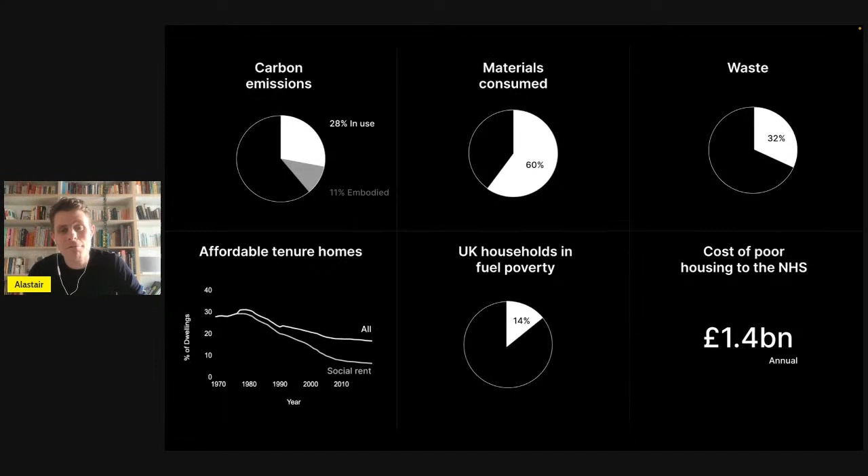We know that we still have a massive shortage. We're still building incredibly poor quality housing. We have a massive shortage of affordable tenure homes on things like public land. Buildings are still huge contributors to the single biggest source of material consumption, and so on and so forth across pretty much every metric, right? We don't need to spell these out. Upshot is we're doing collectively really, really badly at transforming the way we build for the 21st century.

And one of the things I always find weird about this is that actually the strange thing is that most of us agree on what it is we want, right? On what it is we're trying to achieve. We're trying to build beautiful, zero carbon, zero waste, leafy, green neighborhoods with generous, warm homes, prosperous local businesses, great community infrastructure, these kind of neighborhoods that are great places to grow up and to grow old. Pretty much nobody disagrees with that.

And yet, for the large part, we're not doing it. And it's not because we don't have the knowledge. The knowledge is already here; in the words of William Gibson, the future is already here, it's just not very well distributed yet. So we have the knowledge. We kind of have the collective will. So the question is, why not?

To some extent, the answer to that is to do with incentives. It's complex, and this is a big part of some of the other work that Open Systems Lab are doing, looking at things like how we can redesign our land system and our planning system. But actually, to a huge extent, there are examples that get through, and that tells us something if you go and speak to those kind of groups

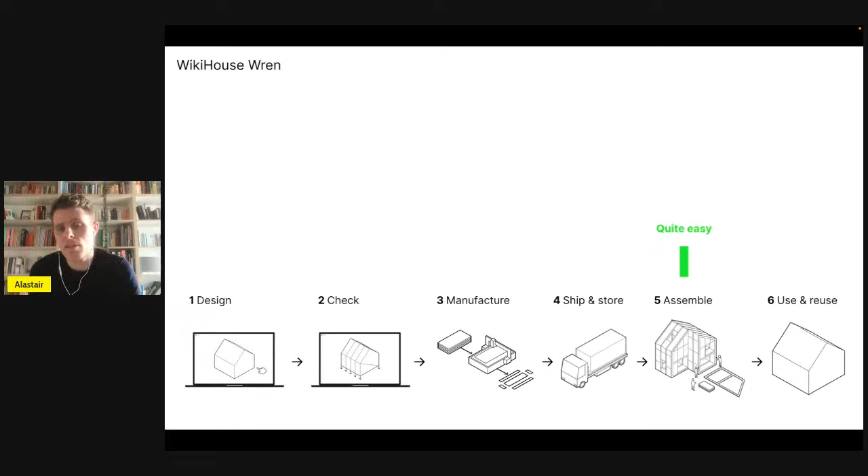But the truth is, it was really obvious to us as we were working with others using this system, that the rest of the process really wasn't easy at all. Right? The system was really hard to design with. Pretty much every design had to be custom and bespoke, and that also meant that it was really hard to document as well, really hard to share files. And Clayton will talk a bit more about how Skylark changes that.

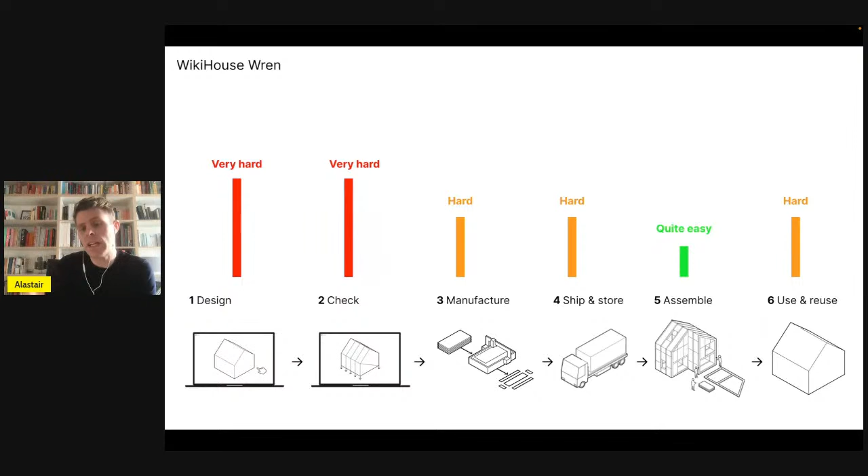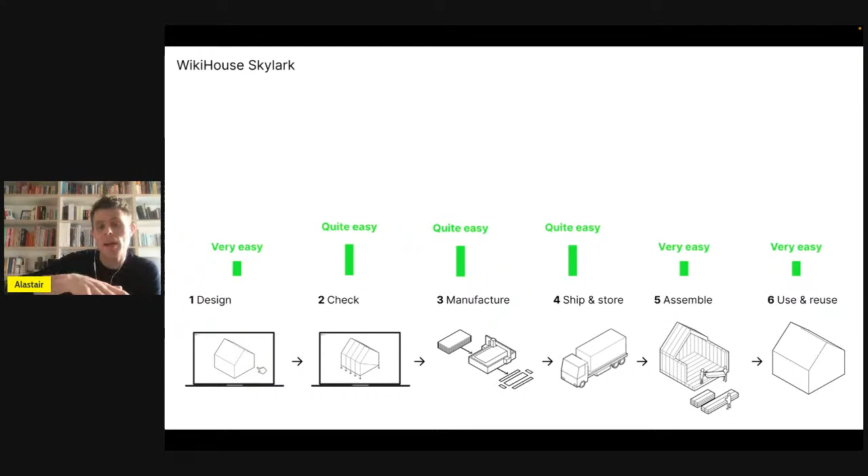But then it was really hard for engineers to understand in each case, etc. Then on site you ended up with this stack of hundreds and hundreds of parts that you had to sort through and store. So when we looked at the whole picture, we were really aware that actually our job isn't done until the whole thing looks something more like this, right? So this is our ambition, to say, how can we make the entire process as simple as possible? And really the objective is this, right?

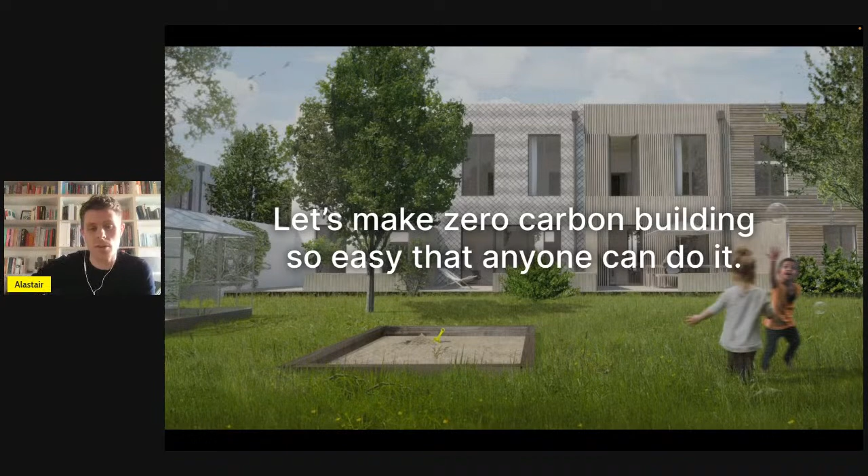This in itself will not end the housing crisis or anything like that. But what we can at least do is take the idea that building zero carbon homes is difficult off the table. Let's make it so easy that any business, any community, anyone can do it, and everyone knows that they can do it. That's really what we're trying to do, trying to move ourselves into that kind of future as quickly as we can.

The second big idea is obviously the one about manufacturing. So in the last few years, there's been huge progress, particularly in the UK, around moving towards more manufactured models of building, which is cool, right? It's dragging construction, I wouldn't say into the 21st century, but at least into the 20th century. And generally speaking, when we're talking about off-site manufactured homes, you're talking about something that looks like this, right? These huge factories that cost many millions of pounds to set up, and that's cool, right? These are really impressive facilities that can turn out one or two houses a day at least, right?

So really impressive, but there are also real issues with this model. So it's good for some things, but it's not good for everything. It's particularly good for large-scale projects, large-scale supply chains on big sites with a much more standardized product. But of course, that's not true of all development, right? Lots of projects aren't big projects. They're small projects on small sites that are slightly customized. They also tend to be less resistant to sudden spikes in demand and also downturns, and that's historically been the most challenging thing for this model of highly centralized manufacturing: you get a downturn in the economy and you have this amazing capacity but no demand.

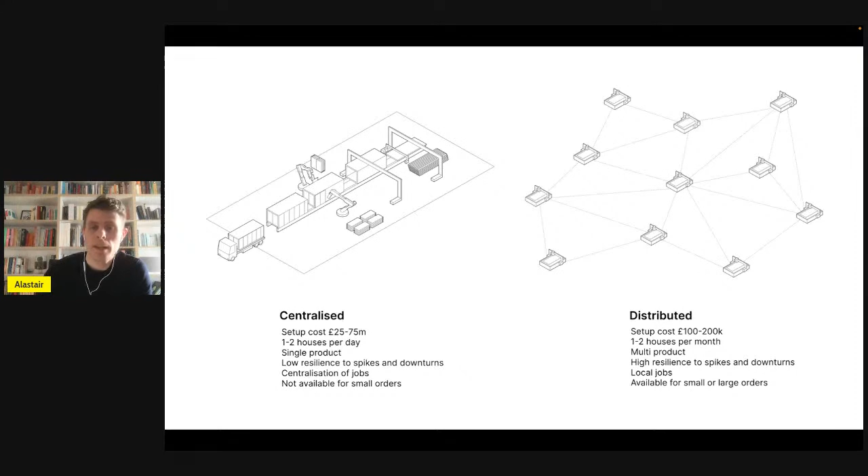And so the other big idea about WikiHouse began with this idea of, well, wait a minute, if we can make a building system that can be manufactured in a really small scale factory, which has a really small setup cost, you can have local small businesses manufacturing these components, and collectively this network of distributed manufacturers can form an industrial capacity which can at least match, but potentially in many ways be more effective, not necessarily as efficient, but more effective and more flexible and more resilient. And that is a cool vision of manufacturing. So let's actually make that real as a manufacturing approach.

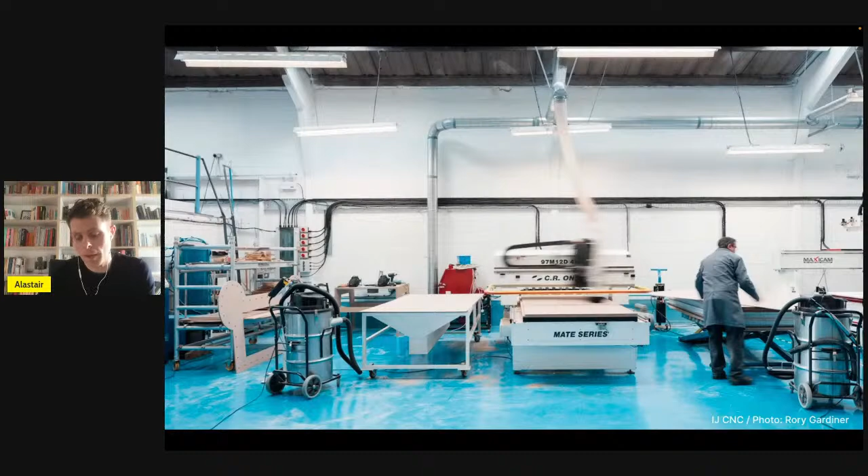So maybe the housing factory of the future doesn't only look something like this, it can also look something like this. And I know a lot of you have manufactured WikiHouses in spaces a bit like this one. And so that's a really big part of the work, that when we're working on Skylark, we haven't just been thinking about designing the end product, the end houses, but designing the whole process and really thinking through the economics of space and really trying to optimize that. And again, Clayton will talk a little bit more about that, but this idea of the shifter blocks was trying to make sure that we do a little bit more of the pre-assembly in the manufacturing space as the sheets come off the machine.

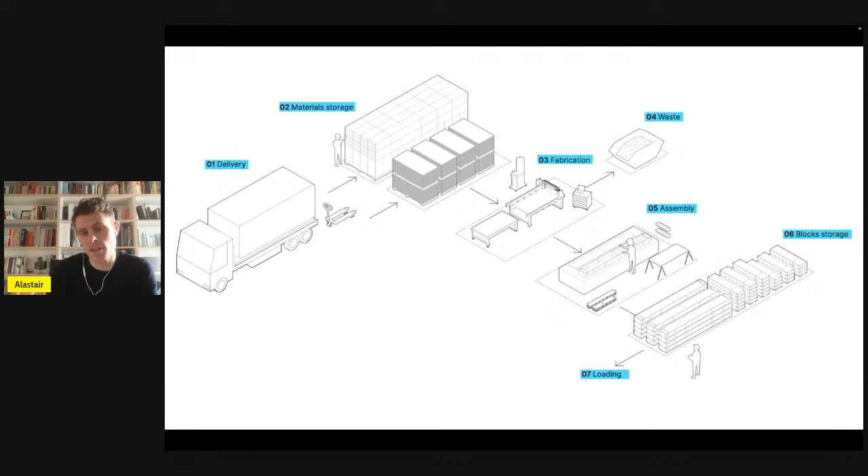So yeah, it's designing a process as much as designing a product, and then open sourcing that. And there's a lot more that we're going to be learning about how to standardize that and do quality control. So this idea that in many ways it's never really been about making houses, or it has, but it's really been about building capacity.

We want to build economic capacity, because once you build distributed local economic capacity so that all businesses everywhere can build zero carbon homes, that beats building just one company. And that, of course, leads us seamlessly to the third objective, which is make it open source.

Because again, what's really funny about open source is when you say, we're sharing all these files, people look at you like you're mad, like it's this sort of act of altruism. But we don't think it is, necessarily. First, because nobody owns the IP of the brick, right? Nobody needs to. It just belongs to everybody.

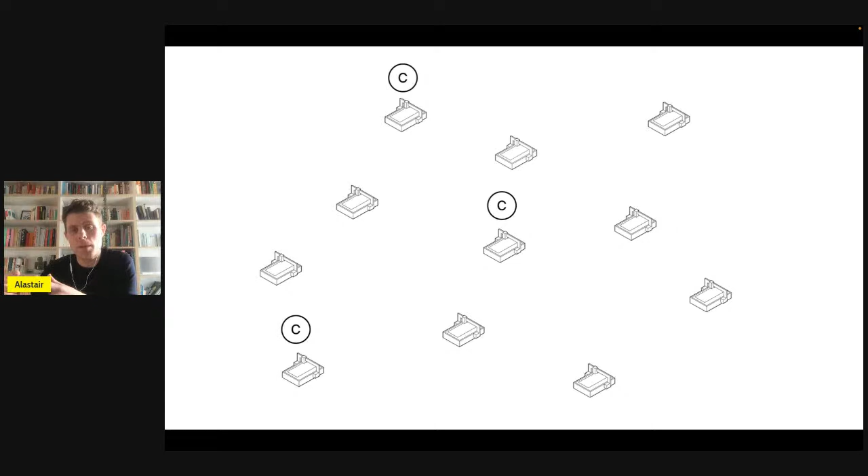But also right now, even if we took this distributed ecosystem, what we have is loads of cool people coming up with really good ideas, really cool building systems and stuff like that. But those solutions are locked behind the limited bandwidth or capacity of just one company.

So we say, isn't it potentially more exciting and actually more effective to say, what if all those businesses are drawing from a shared common pool of knowledge, and then all sharing their feedback back into that common pool of knowledge. So in one sense, it looks like you're giving away knowledge for free. But in fact, what you're actually doing is recruiting an R&D army of hundreds or thousands of people.

And so many people have contributed little bits and even just bits of feedback to WikiHouse that has got it to where it is today. And particularly going forward, Mel will talk a bit more about this. We wanted to make it much easier to share and improve and version the files, but not just that, literally just capturing feedback is really valuable.

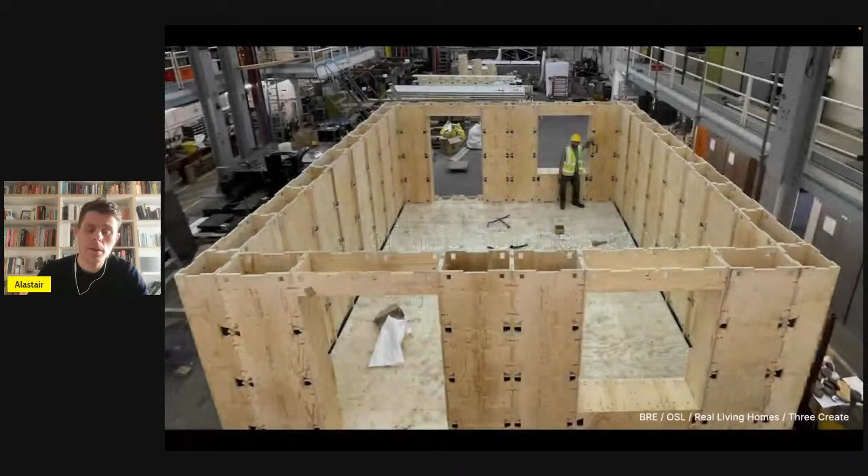So if you're using WikiHouse and you see an opportunity to improve it in even the smallest way, or you see a bit on the website that's not working, and a lot of people have already been doing this, it's been fantastic, just grab a screenshot, go to WikiHouse feedback and send it. And I guess this is also an interesting point to confirm.

When we are showing you, as Clayton's about to show you Skylark, everything that we're showing you is not us going, here's this great thing that we own. What we're saying is all of this belongs to you. There's a whole bunch of companies who I'll give proper credit to at the end of our session this afternoon, a whole bunch of companies and organizations that have collaborated on doing loads of R&D behind Skylark.

And they all did that not in order to own it, but because they wanted to use it, because they wanted it to exist. And so, to the extent that Skylark is of any use, it belongs to you. And with that, I'll hand over to you, Clayton.

Hopefully you can see my screen. Yeah, so that brings us onto Skylark. It's less of a dramatic reveal because it's been out there on the website for the last few weeks, and I'm sure some of you had a chance to play around with it and at least have a browse.

But with Skylark we've got this benefit of 10 years of prototyping and R&D and experimentation and actual built pilot projects to draw on, and that's given us some key lessons, and it's been informed by the work and input and feedback of so many other people out there, and various WikiHouse teams and hobbyists and manufacturers around the world.

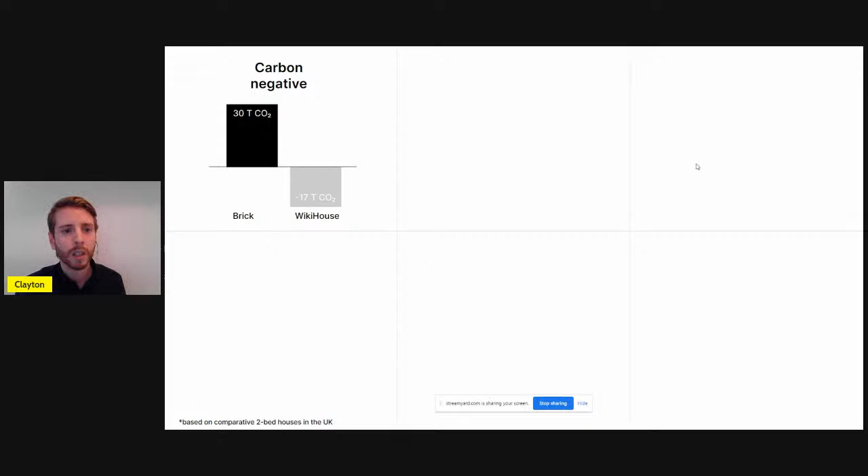And in comparison to traditional masonry, that's a massive difference. And we worked with Leeds Beckett University recently in a report that you can find on our website. And they looked at the lifetime carbon emissions over 100 years, including embodied carbon emissions and also end-of-life emissions. And over that 100-year life cycle, it was half the amount of the total carbon that you would find if you went down a more traditional construction route. So that's a big change.

The other thing, I mean, this is particularly looking at a European context, but that it could meet most housing needs, and that the basic blocks within the library would be able to do the types of low to medium rise residential housing and small offices and small workspaces that most of the construction in Europe is. That library will be expanded on, and there'll be bigger spans and more form options, more types of roof and things like that as we go.

But we also want to make sure it wasn't too limiting in terms of design, that you could build the types of projects you were doing already, particularly in terms of mass housing, and switch that across to Skylark rather than going down less sustainable routes.

And a big aspect of this, something really looking into the future, is that instead of just using materials once and they go to the building, if you make a change to the building or its use ends, the building then gets demolished or has to be retrofitted dramatically to become relevant again, you could actually reuse and recycle large portions of the building structure. And not just the building structure, but everything else. So it's looking at making sure that the structure itself, the way it interfaces with other materials, means that things could be mounted and demounted.

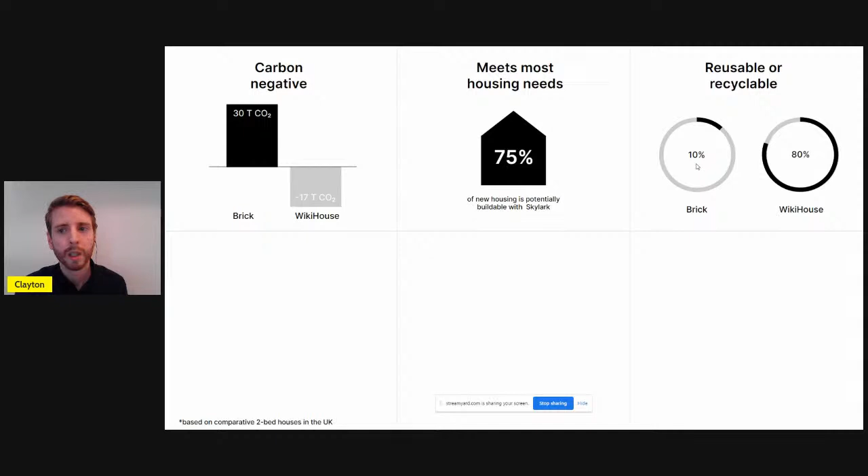The structure itself could be reused on another building, or in the very end of life case, if it had to be retired, you could recycle it as well. And there are some downstream companies here in the UK that will take used plywood and turn it into chipboard that can be used on other building products as well, which is really cool to see. So we want to make sure that there's that long-term view built in as well. It's circular to begin with.

And it has to be easy to learn and also really quick to build. So easy to learn for designers who want to take it and create designs and hopefully beautiful architecture and create neighborhoods with it. And then it needs to be easy to understand for a build team, for whoever's working on site, be they volunteers or professionals or existing contractors who are used to working with traditional methods, to say, okay, this is something new and different, but it's not going to take me on a 3-month training course to get up to speed with. It's something I can work on within a day in terms of how parts fit together and learn really quickly.

And that massively reduces the build time. So we're looking at at least half the time on site. So the labor costs are less because there's less labor work involved, and most of the stuff is being cut to fit in size, so you don't have to do any cutting, but it's also being put together in a workshop environment before it's arriving to site. So there's less work outside in the weather and the elements, and then looking at heating bills as well.

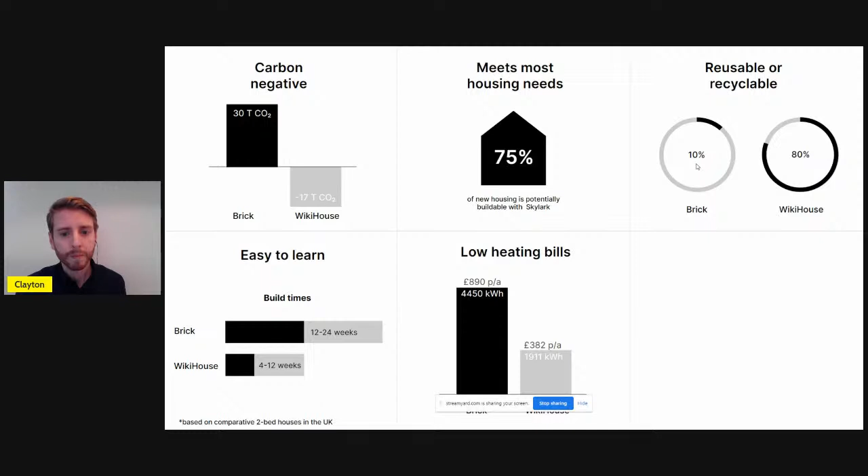Because this is a particularly big one at the moment, obviously the cost of energy has increased so much that we really have to be much more mindful than we have ever been in terms of the efficiency of the building fabric that we're constructing, to make sure that it is as efficient and as draft free as possible and doesn't leak heat, and that over a year it's going to save you hundreds of pounds. And as well as the hundreds of pounds, you're also saving lots of carbon and lots of energy that would be otherwise expended in an equivalent minimum building regulations building. So that's a massive difference.

And then the most important one probably is that it's great to have all this stuff, but if it's going to cost 3 times as much, it's not really going to go very far. So we want to make sure that the materials and the manufacturing processes and everything that goes into it is coming out at least cost comparative with other methods.

And there's a range in there. Obviously, it depends on the types of specifications that you want to have. We did have some questions back on an earlier presentation of this, about what's actually in these costs. So these are superstructure build costs, so everything that's not including the land, design fees, and things like landscaping and stuff like that. It does include a sort of basic foundation if it's quite a simple site. Obviously, if it's a more complex site, it's not.

And that's not just the structure, that's everything to clad it, windows, doors, fit out, that kind of thing as well. So that's the sort of cost range that we're operating in. Obviously, you can go higher than that if you really want to go sort of all in, gold taps and all that. But for most projects, this will do.

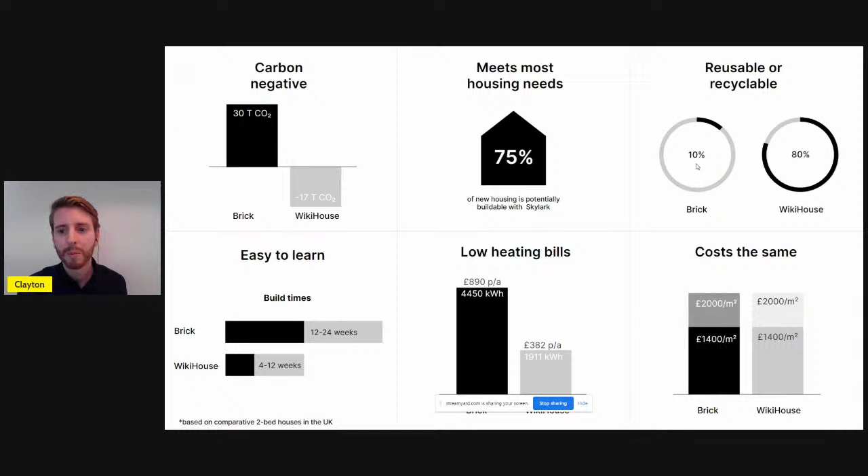And so what is Skylark and how does it work? If you've been to the library, you'll see we've taken what was WikiHouse in terms of a sort of language of connections and joints and really intricate CNC joinery, and broken it down to really standard building blocks. And these building blocks all come off a CNC machine, and, as there was a question earlier, we use an 8 foot by 4 foot, 1.2 by 2.4 meter bed size CNC, because that's also the sheet size of the plywood that we're cutting. You could do bigger, but these are standard off the shelf products.

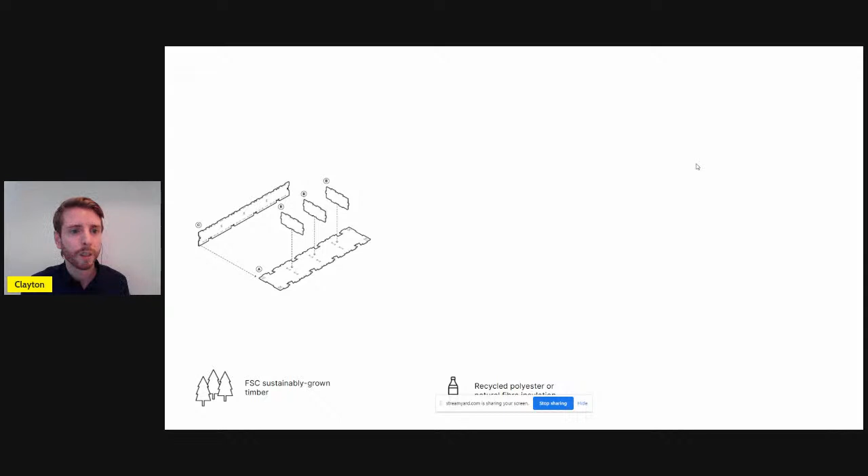And from there, we can machine the parts. As Alastair alluded to, we tried to create the system in a way that while it's machining another part, you can be assembling the part that's just been cut. So you're not doubling up on effort there.

And these cassettes, in this case a wall cassette, get filled with an insulation material. We tend to favor a soft fill material like a loft roll, and there are some really good products coming out in the UK. One is using recycled polyester from plastic bottles. So it's the same sort of stuff you get inside your jackets and coats, but it's being used to insulate your house. And that's really cool to see. So that all gets built up.

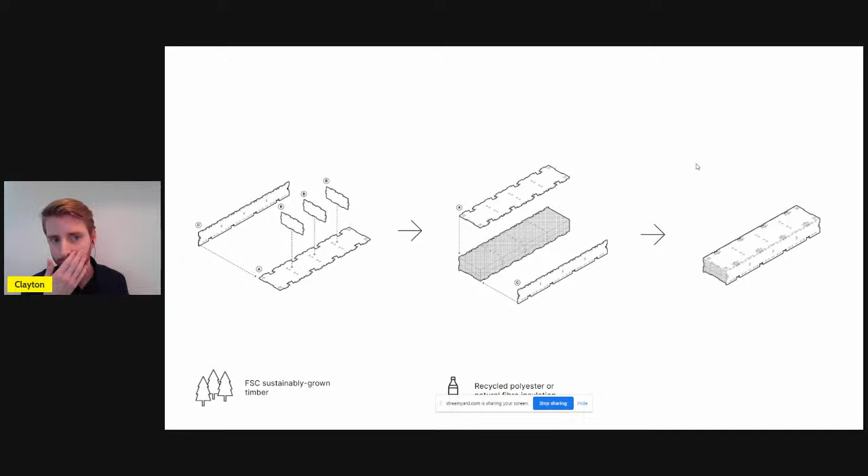The machining time for something like this is probably less than an hour to machine these 2 sheets to make this block, and then 15 minutes to put it together, and then you've got a section of wall. And because we can make quite accurate predictions and get feedback from manufacturers in terms of how long it takes to machine and what the cost implications are, we can work out very quickly what a standard cost of a block might be. And once we know the cost of a block, we can work out how many blocks are in your house, and very quickly work out what the house is going to cost.

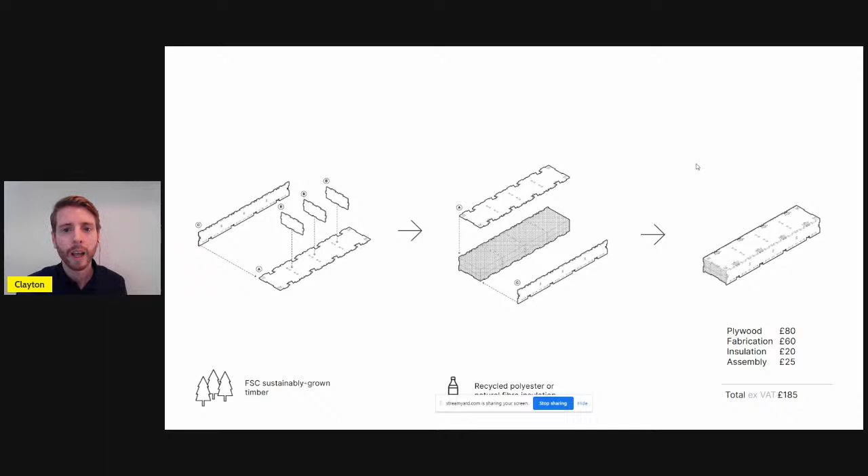And you've got this pricing information at your fingertips to begin with, not something where you've created a design, gone through the whole tender process, and you get to the end and then it's too expensive. You can actually know what the likely cost is. It's a good estimate cost at the very beginning.

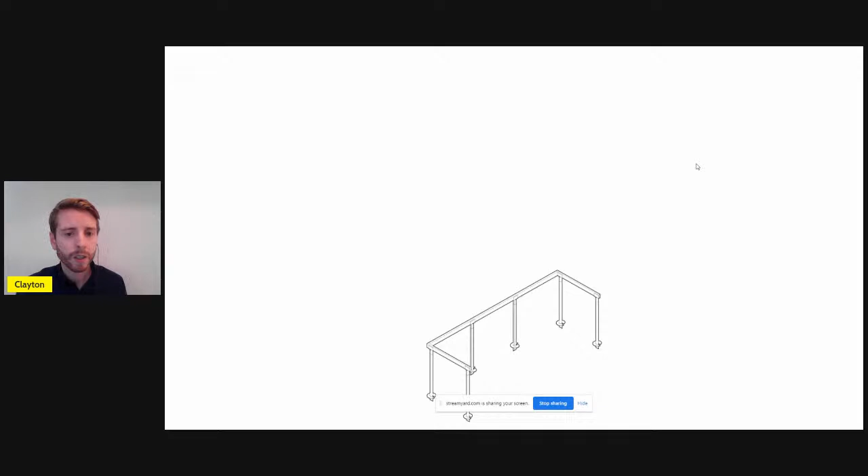So in terms of the build-up, and I'm sure I can take questions about this later and go into more detail, the whole system is designed to sit on foundations, and it doesn't really matter what those foundations are. We talk about being foundation agnostic, where you can have screw piles like this. You could have a concrete strip foundation. You could even sit it on a concrete pad, where you just cut out the base structure of the Skylark. So there's no timber floor, it's just sitting on a concrete floor and building up from there. There's quite a range of options, and obviously it depends on the type of site, the ground conditions, and what engineering requirements there are.

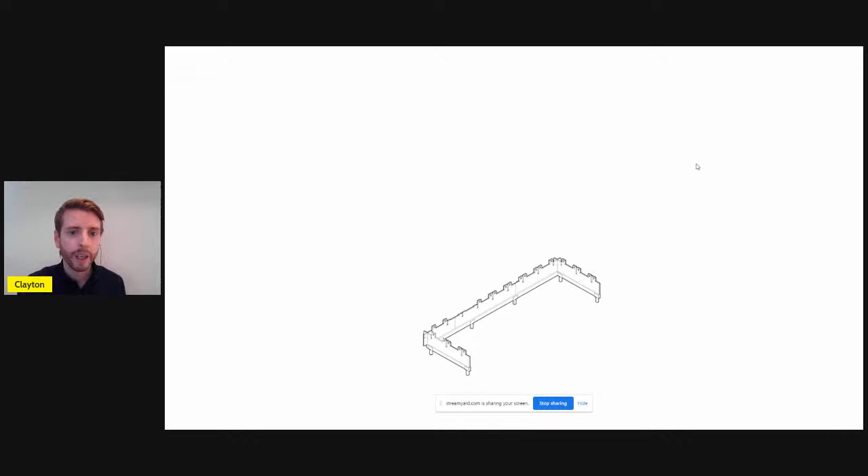And the first Skylark elements you place down are what we call combs, which are horizontal connectors, but they stand vertically, locking together, and they form a sort of base beam that gets fixed to your foundation using fairly standard steel brackets. We'll have some more details about this coming on our website soon.

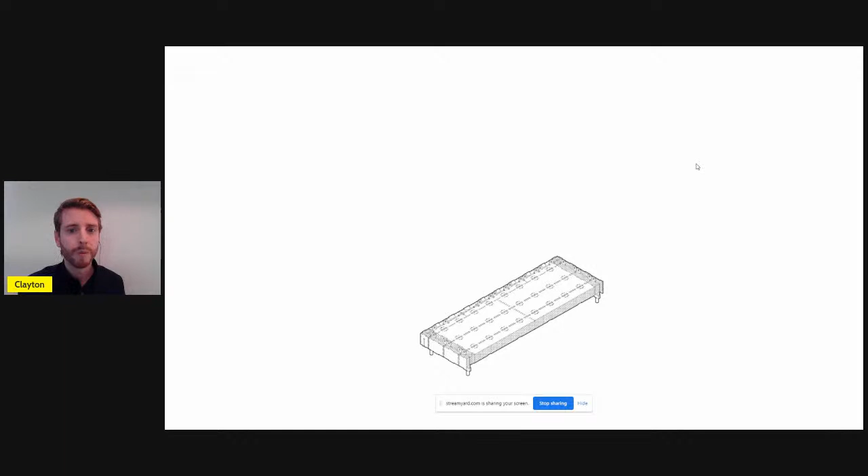Once that's in place, that's sort of a guide for then placing your floor beams on top. So the standard Skylark spans, there's a range of them. We've borrowed language from clothing sizes, so you'll see extra small, small, large, extra large spans. And then an end beam as well, which is where your perimeter end wall sits. And all these are pre-insulated.

They fit together. There's these interlocking bow ties that tie the structure together. And then it's a case of dropping the wall blocks in place. And this all happens really, really quickly. It's difficult to convey until you see it on site just how quickly you can get a structure up, because all the hard work has been done for you by the time you get to site. And it's really easy to tap these bow ties into place, and you've got quite a rigid structure that doesn't need any propping up as well.

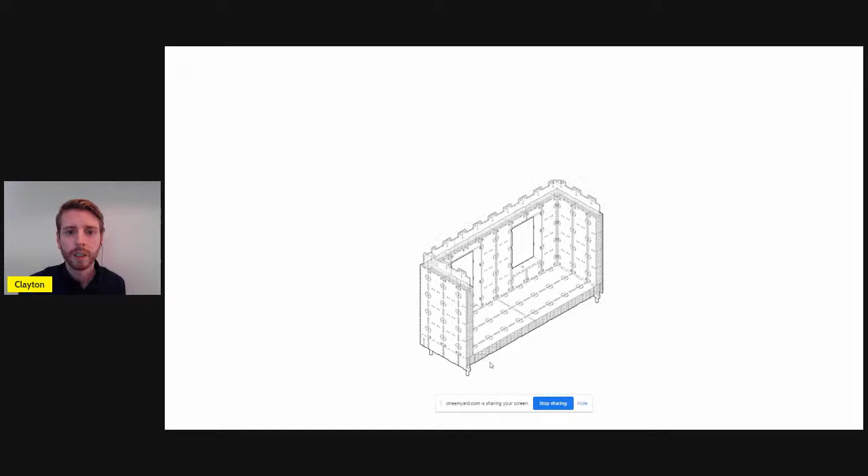I will add, there's also some pegs that go in the bottom here, which connect the combs to these wall blocks and help to daisy chain the whole structure together. As you can see, there's another layer of combs when you're building upwards. Then you can build walls, including gable end walls with different pitches. That will all be coming shortly. And add windows and openings where they need to go.

You can top off the roof. The roof comes in 2 sections that get put together. We try and look at innovative ways to do all the roofing without needing external scaffolding. So they can be raised from inside the building and positioned into place. We've got some details on possible assembly routes for that. We'll put them in the guides as well.

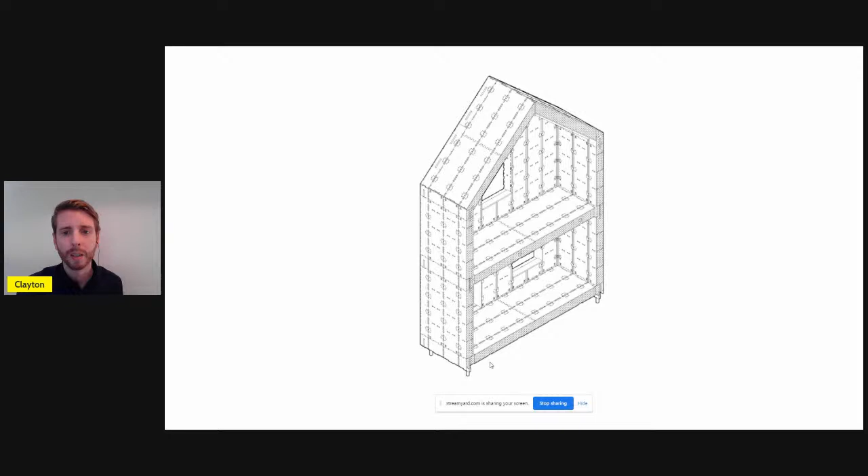And after that, once you've got your plywood structure, you can very quickly wrap it with a waterproof membrane. And then that will give you a basic watertight shell. And once you've got your windows fitted, you've pretty much built a weatherproof structure that you can then work inside of. That doesn't make any difference to having done it on a factory floor or out in the elements. And yeah, I'd say the time from foundations up to this point is probably 2 weeks for a 2-story house.

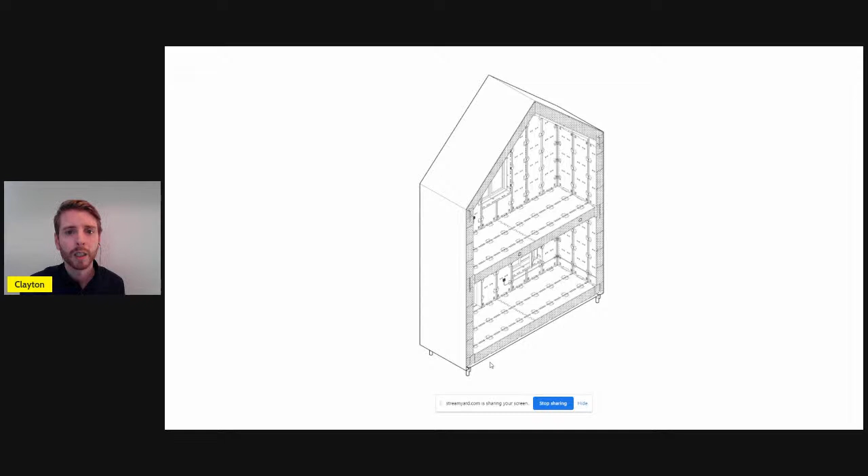And then you can go on and clad and line it and finish it how you want. Because you've got an 18mm plywood substrate, you can fix battens wherever you want. You can put your vertical cladding on. It could be timber cladding, it could be sheet metal, it could be terracotta tiles, you name it. Anything ideally that's a dry fixed product that is quick to install, doesn't require any specialist skills, just a screwdriver and a bit of elbow grease, and from there you can make it look like whatever you'd want your design to look like. We leave that bit up to the architects really.

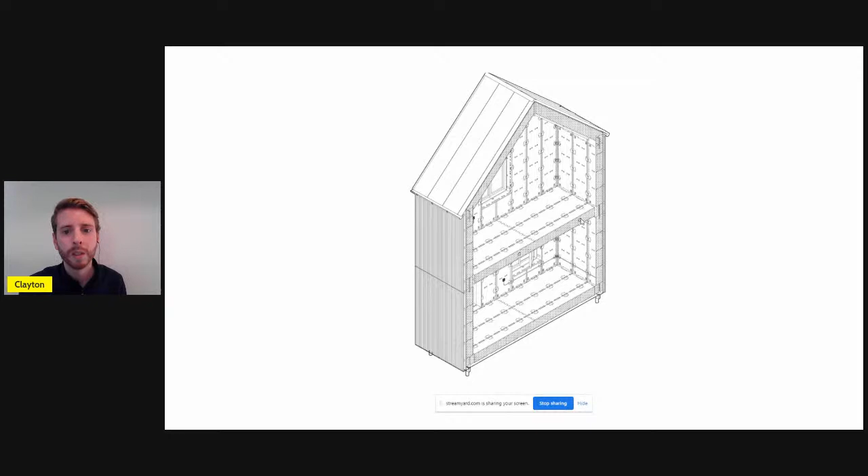And run services and things inside as well. So the blocks, without having the structure behind me to point at, have a service run built into them, both in the floor beams and in the wall blocks. So it's deep enough to take an electrical socket pattress box. And you can run all your cabling through those voids, and you don't need to put battens on the inside because it already has battens built into it. That means when you come to do your drywall or plastering or flooring or ceiling, you can just screw this into place without having to cut battens first, which really speeds up that process and makes it easier.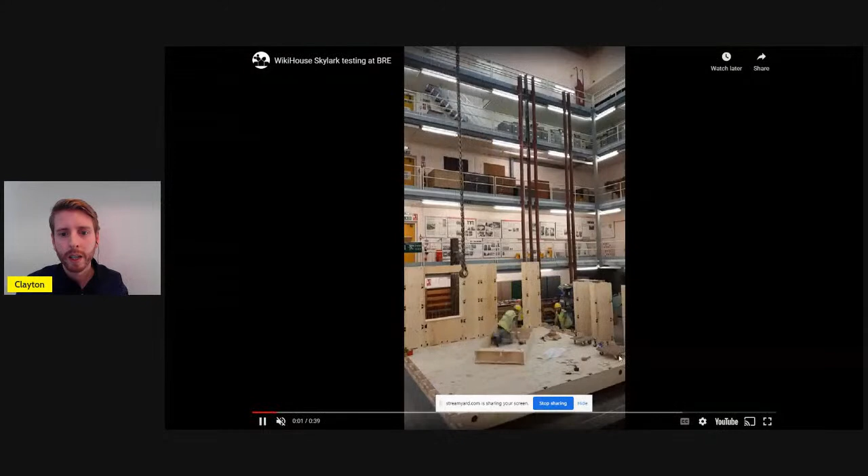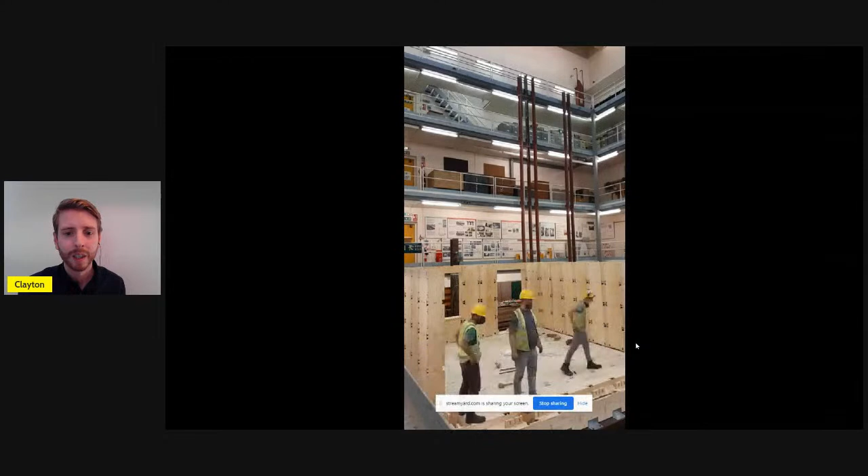So here's a very quick little video. This is 6 months or so ago now, where we did some structural testing at BRE, and we built this full-size 3D module in the BRE structures lab. We've done a few prototype builds since as well, but this is just a very quick idea of the speed to put up those wall boxes, and then we spent a bit of time fiddling around with the existing base frame we're working with, and putting the floor blocks into place. And again, positioning windows and things like that.

You've even got the option, if you got on site and decided the window was in the wrong place, to move it to a different location without radically needing to change the design, which is quite nice.

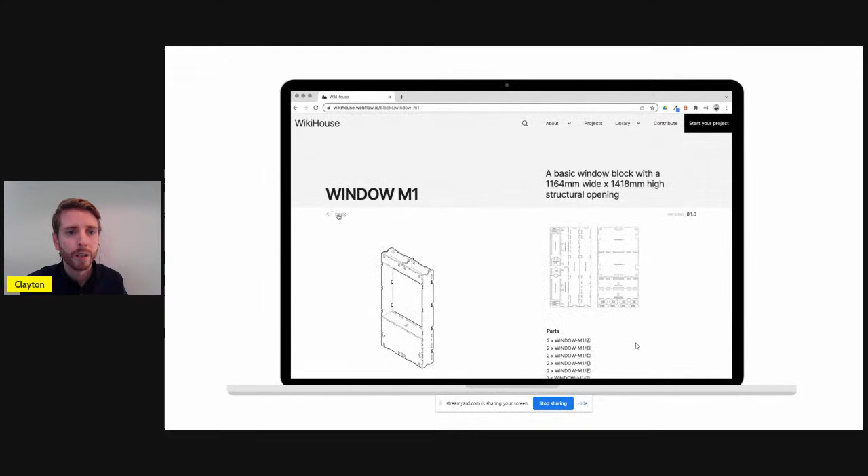So if you go onto the WikiHouse website now, you can find all this information. I'm sure many of you already have, but you can go into the block library. You can find details on what all the blocks are, including specification info, so sizes, heights, weights, embodied carbon for each of them. You can download them in a range of different CAD formats, which we will be expanding, trying to find more common platforms that meet the needs of designers and anyone who's using it.

Or you can even go, if you're a real nerd, into the GitHub and you can actually contribute issues. You can download the models. You can create forks of these versions if, for instance, you felt like the roof pitch wasn't quite the roof pitch that you wanted, and you wanted to have a go at re-engineering it to meet your needs. And if that's a really useful fork and it's going to be useful to other people, we definitely invite you to try and share it back with us so we can actually merge it into the main library as well.

And then to help support people doing projects with WikiHouse: a big missing part of this in the past has been a lack of documentation and guidance that translates a lot of the expert knowledge that people who've worked with WikiHouse before have into something that most people, or any new professional coming to this, can understand. So we try to break it down by the various trades. For architects and designers, there's a specific guide showing you how to design with WikiHouse, what the basic elements are, how you might go about detailing things, and what you can do with it.

And then for manufacturers, particularly if you're a new manufacturer, you've got a CNC workshop and you're interested in making WikiHouses, there's quite a good guide there with details in terms of the space requirements you need, the types of bit sizes and tooling, and all that aspect. Some of these will require a few graphics images to finish off, but hopefully they'll be quite intuitive to follow.

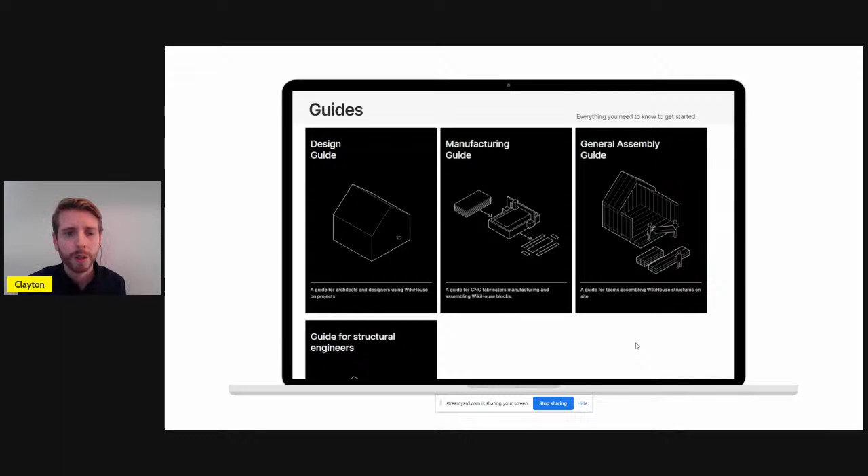And then for each block, there's an assembly guide that's in the block library. And each project that gets built with WikiHouse will have its own dedicated assembly manual as well, which is separate to these guides. So that wraps everything up that I was going to talk about. I'm going to pass on to Gabriele, who's going to go through the details of how the structure works and what makes it actually stand up, and can go into a lot more detail about the physics behind it as well.

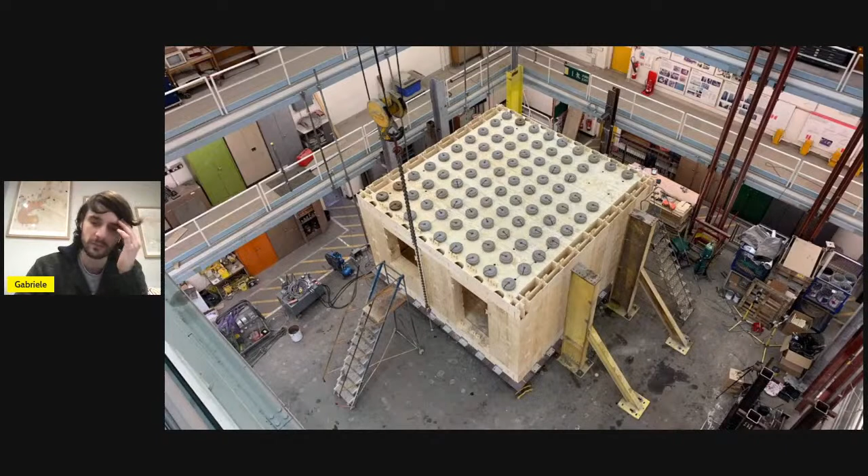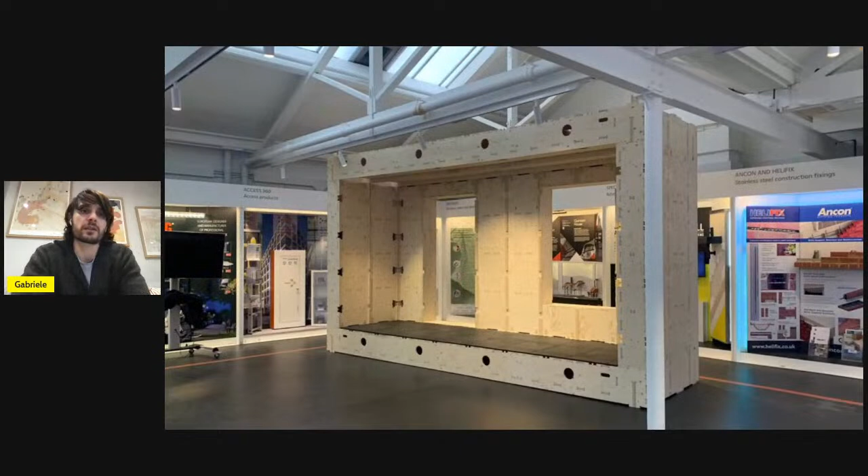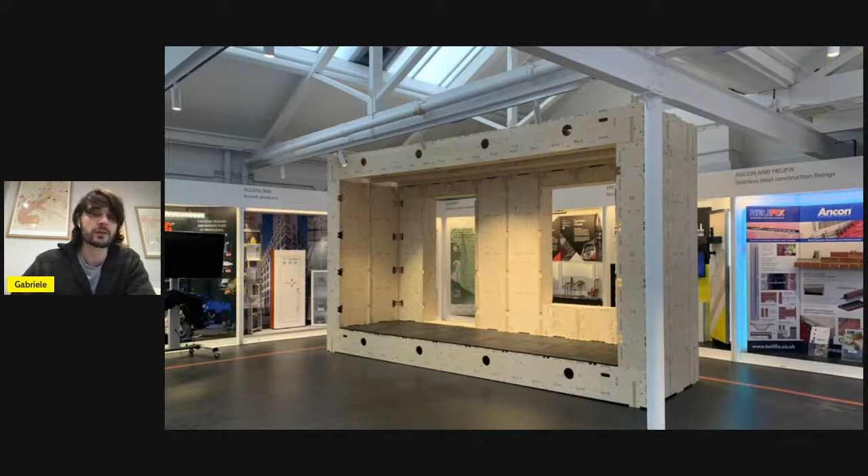Thank you very much, Clayton, and good day, everyone. I would like to start this presentation talking about how lucky we have been, because finally, after 10 years, we had the chance to actually bring WikiHouse into the lab and test it to understand the structural properties, so we can provide scientific evidence about how the system works. This is one of the modules that we built for the last exposition that we had in London. In this presentation I'd like to share with you some of the lessons we have learned in the last few months with respect to the structural properties of Skylark.

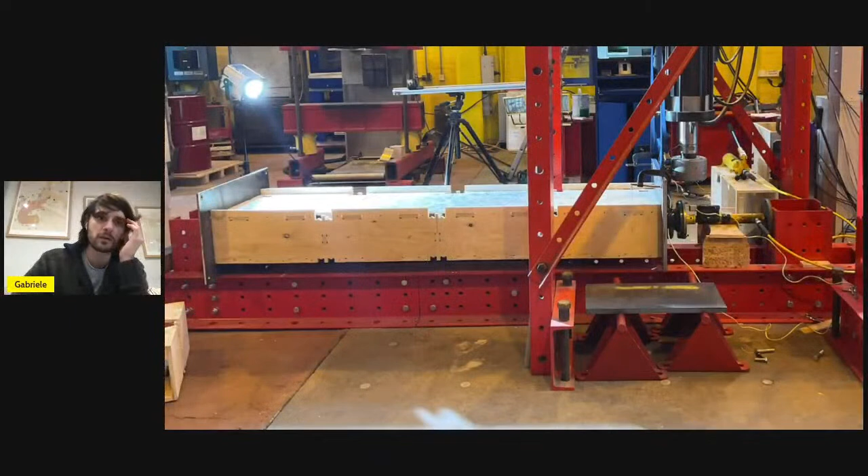I would like to guide you through some of the elements that compose WikiHouse, and the first one I would like to talk about is the column, one of the columns forming the walls. This is one of the first elements that we had the chance to test. This is a picture that we took at Edinburgh University, doing some testing on columns in compression. The yellow element you see on the right side is what we call a hydraulic jack. It's basically a little machine that you can pipe oil into, and this element is trying to extend, and because it's reacting against the column, it's putting the column into compression.

So we're trying to break the element and see how much force it takes, so we can have a feeling. And it was quite interesting, because it was one of the first tests that we were doing on the system. So we had an educated guess of how much force we could put into the system.

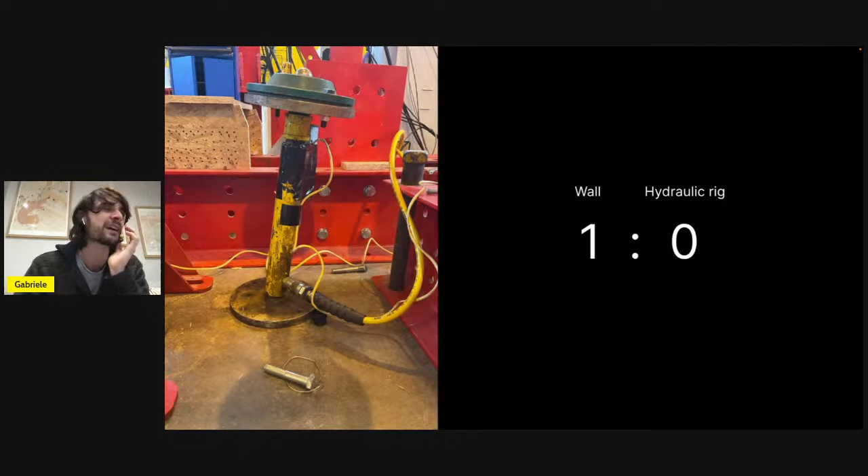So based on that, we decided to take that specific hydraulic actuator, which can take around 10 tons. And when we were carrying out the test, it was pretty cool to see that our educated guess was not very well educated, because we pretty much broke the ram before breaking the column. So that's quite good from a product perspective, but I can assure you, when you're in the lab and you see something being compressed at 10 tons and things don't go quite the way you think, it's not as fun.

But basically what we did is we just took a bigger one, and it's actually pretty cool to see what happened after, and I will show the video of the test at the end of the presentation.

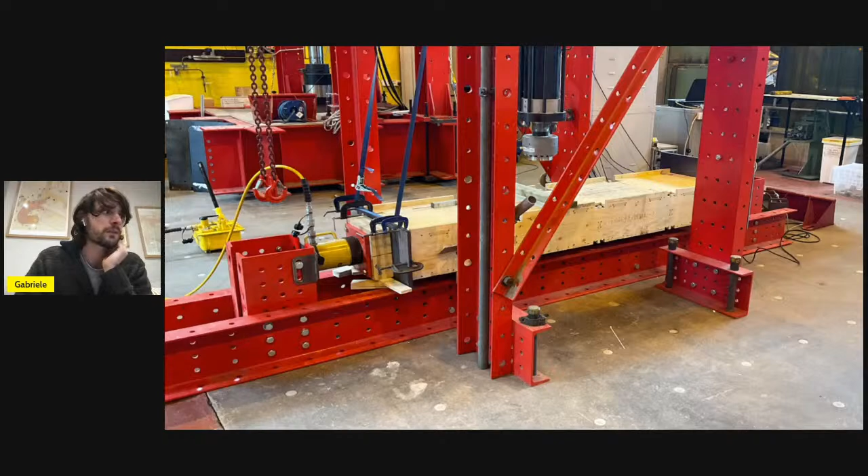But if we just go as a flash forward to the results, basically we were able to put 140 kilonewtons into the column, sort of an average out of the 4 or 5 specimens that we did, which, if you're not a structural engineer, might not tell you much in terms of numbers, but just to give you a feeling, it is equivalent to the load of not 1, not 2, but 3 elephants, one on top of each other, provided that you manage to stack them that way. So it's a pretty decent amount of load that you can put into a timber column.

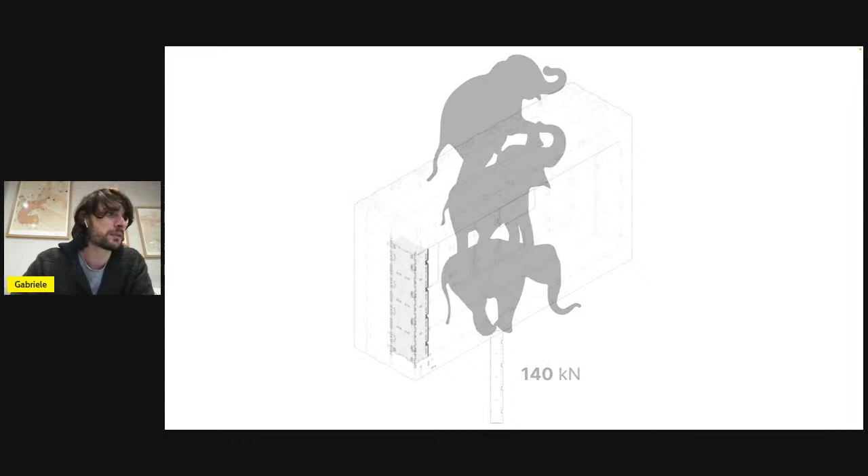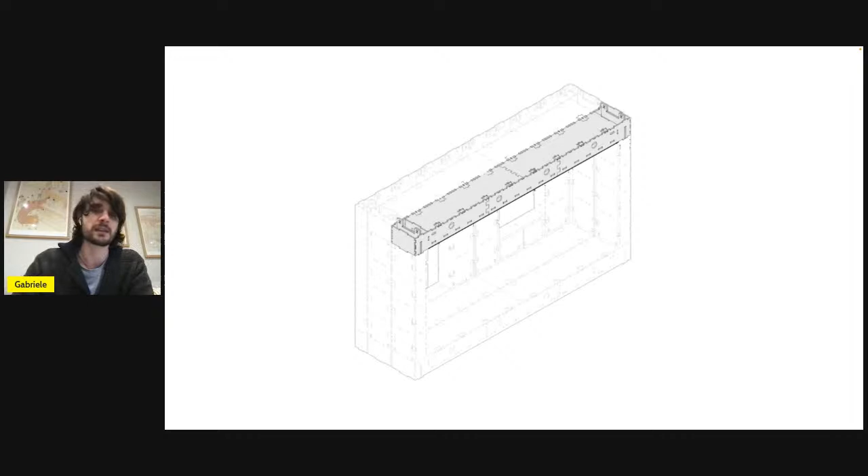This is cool. This is the column, but obviously, if you think about a building, before reaching the column, the load has to travel through the beam before going into the column and then into the foundation. So the beam is one other element that we managed to test. And before going into details, I'd just like to share, for those of you that might not know much about structural engineering, what are the principles behind the beam.

So you might be familiar with traditional solid beams, especially classic timber beams, which are rectangular. And the way they work, when they start working in bending, you have the top fiber of the beam which starts working in compression. So if you imagine your beam trying to bend, the top fiber starts working in compression, and the bottom part starts working in tension.

So when you use a material that you can customize a little bit more, for example, steel, you potentially don't see solid block elements, and the reason is because you try to put the material where it's working. So the typical shape for steel is the I-beam shape. So you're putting the material on the top and on the bottom, because those are the fibers that are working. And you also achieve another effect, that you're removing dead weight, you're removing mass from the part of the beam that is not contributing much.

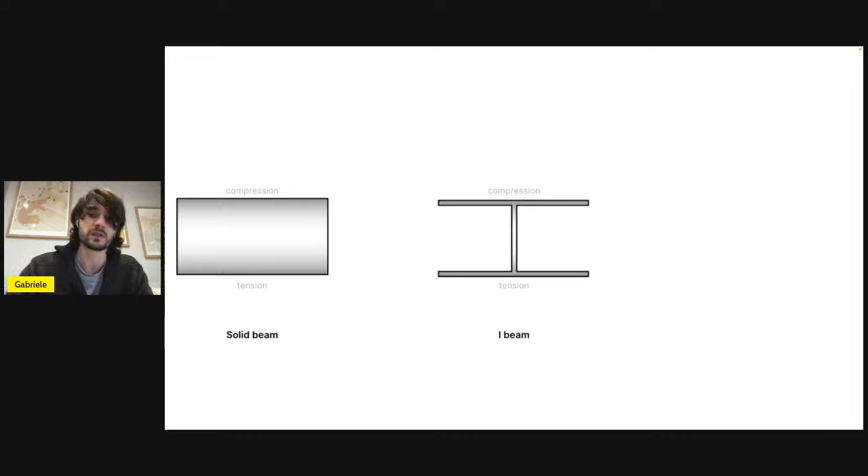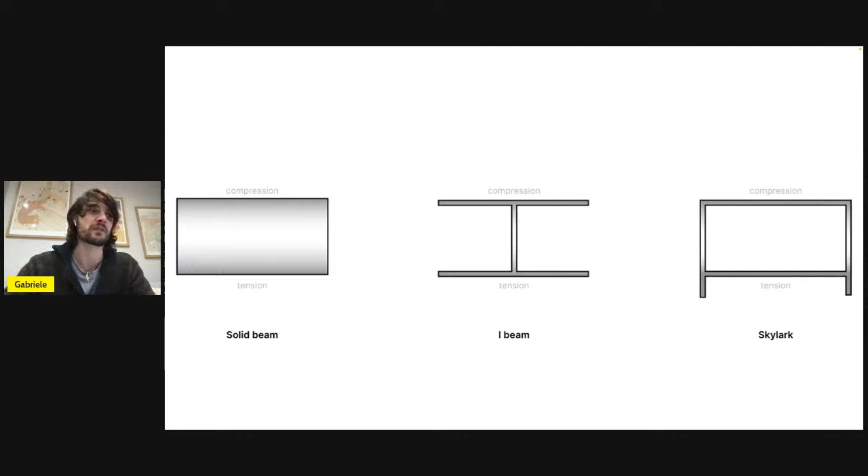So a steel beam made like this performs way better than if the same beam was a solid block. And that's the same philosophy we try to apply to Skylark beams. So we have this cassette where the material is placed in the flanges in compression and tension. So with the same property of the material, we actually can achieve a better performance. So in order to understand the properties of Skylark beams, we took them into the lab.

Again, this is a picture of some of the tests that have been done at Edinburgh Uni, and we were applying a vertical load. You can't see much, but there's an actuator behind the red column, which is a slightly bigger version than the one I showed you before, with the only difference that this actuator is controlled by the computer. So we can actually have a little bit better control on the loading protocol that we apply to the specimen.

And you see that the specimen is painted white, and there are some cameras on the right that are tracking the specimen. I will show a better picture after, but one of the things that we do normally in research is that we paint our elements white and we draw some dots. So we are able with cameras to pretty much track the dots that we draw, so we can have a much better understanding of what's going on in the structural elements. I will show you something later on about that, which I think might interest you.

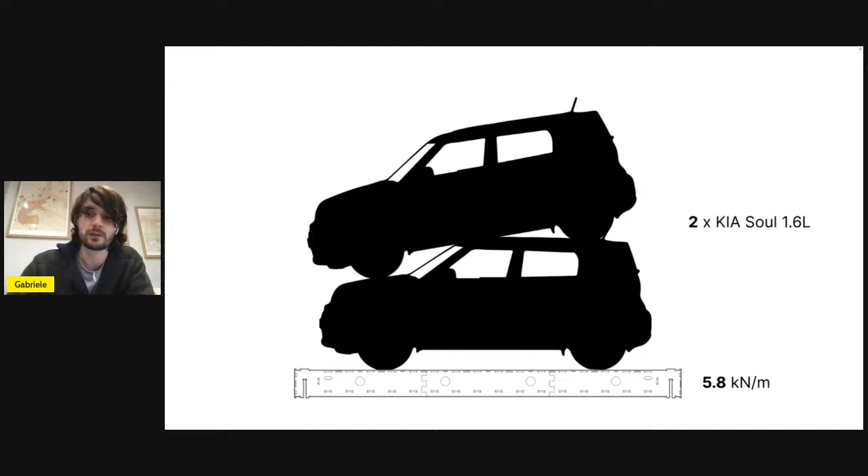So we carried out the test, and basically we were able to put quite a bit of load in this timber beam. And if we look from a distributed load perspective, this is equal to 5.8 kilonewtons per meter, which again, if you're not a structural engineer, might not tell you much, but just to give you a feeling, this is equal to the load of 2 cars, or if you prefer, is actually equal to the load of 3 walruses.

It's pretty funny because we started this walrus drawing mainly as a joke, but we actually found out that there are some projects for building some modified version of WikiHouse in Antarctica. So I'm very much looking forward to seeing a real picture of real walruses on top of a Skylark beam.

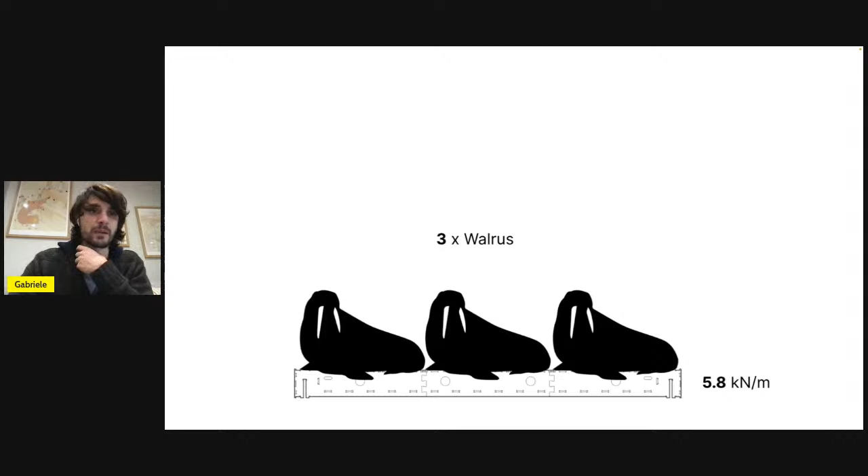So I talked a little bit about the beam, I talked a little bit about the column. The other element I would like to talk to you about are the walls. They are not really an element. We call them sort of assemblies because they are made of more blocks.

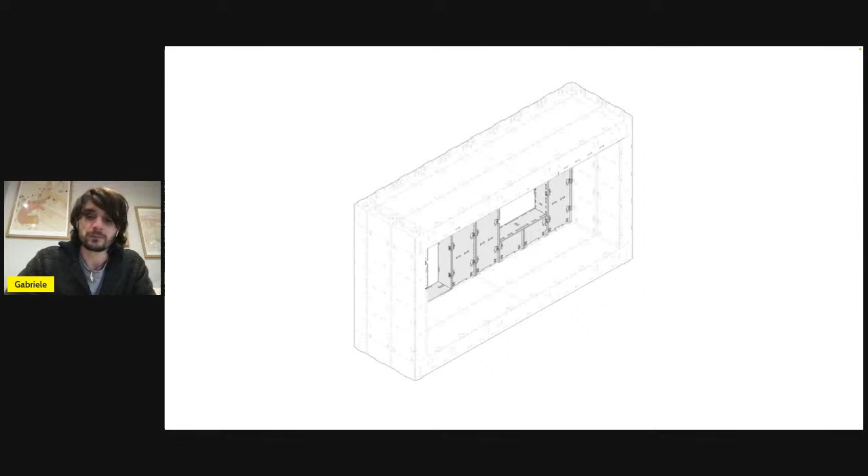There's also some vertical loads which are applied with some steel tendons that are running through and then get attached into the lab, and that's the way we normally try to simulate the load coming from the floor, because we want to test the wall in different loading conditions. So, for example, if that represents the load at the wall at the first floor or at the ground floor or other configurations.

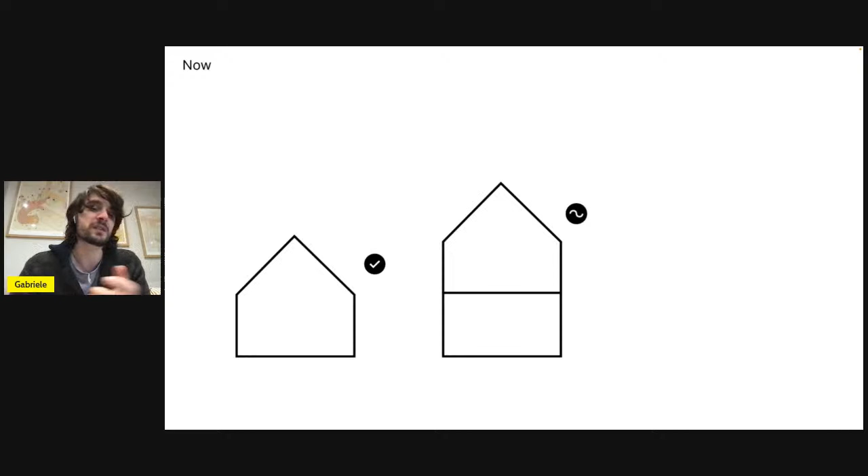Well, this is our current solution. We are actually working on it, and our goal is to move towards a situation where there's no limitation in terms of creativity, in terms of amount of openings for 1-story and 2-story buildings, and then we push any further challenge, any more cumbersome, maybe technical solution to 3 stories and above.

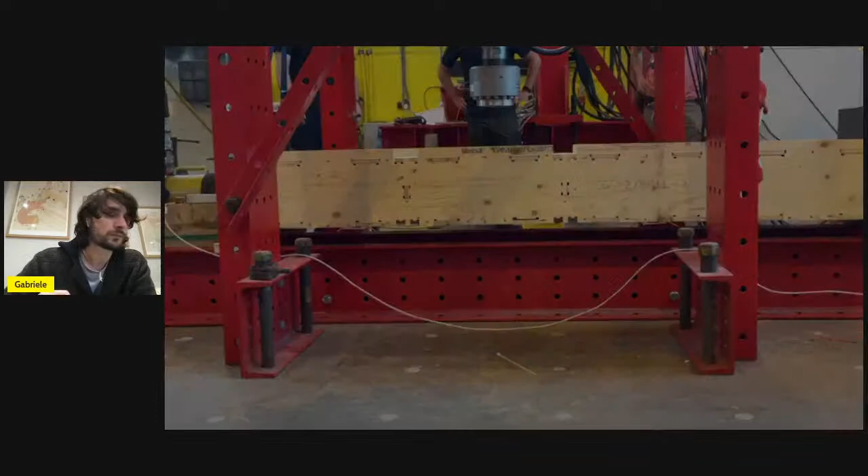Now, before going to the last part, I'd just like to show you one of the experiments that we carried out at Edinburgh Uni. This is a test, the second round when we were testing the beam, and you can see here the structure is about to go, and this is the sort of failure we had, which was quite cool. It was a local buckling in one of the panels near the mid span.

So the last thing I would like to quickly touch on is that all the testing that we have done, walls or non-walls, we try to translate all the information into something that is quite meaningful for structural engineers. As Clayton was mentioning before, designing these sorts of structures might be challenging. You don't know all the interactions between all the panels, but hopefully what we are doing is to provide enough information for structural engineers to actually design the system with much more confidence.

The idea that you can have some experiments done that show you the failure mode, that show you how the structure works, should give a little bit more extra confidence from a design point of view.

And also, this is not all, but we really want to provide scientific evidence. There are some papers that we've written. One has already been published, one is currently under review, because we really want to provide scientific evidence about how Skylark actually works, and to provide data that it is actually a good system and it performs the way it

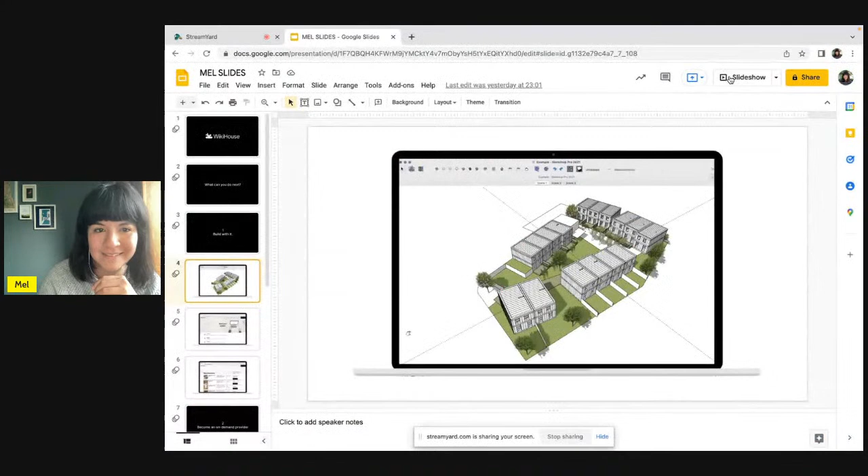Sorry, Mel. You're on mute. Hi. Sorry about that. There you go. No worries. Let me, I'll just remove myself then. Okay, so we are, sorry about that.

We have heard a lot about the product, WikiHouse, and I'm sure you have lots of questions. So I'll just take a couple of minutes to tell you a little bit about where you come in, because I want to talk to you about people. WikiHouse Skylark is for everyone. So wherever in the world you are, whatever level of expertise, if this is your 20th WikiHouse or the first one that you're building, we want to make it as easy as possible for you to build with Skylark.

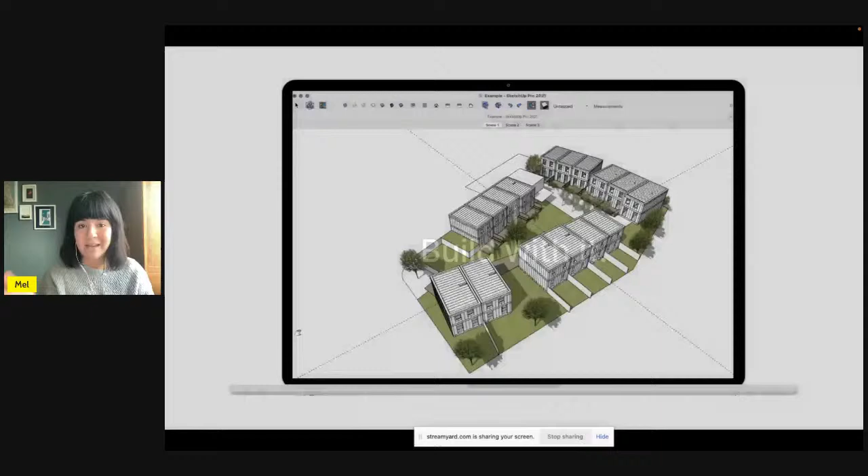So what can you do next? Build with it. Clayton already mentioned that we have a library of blocks using something like SketchUp, for example. You could be building this if you wanted to with the blocks that are available. You just need to download them and start building straight away. We also have a page called Start Your Project, where you can find different bits of information and guidance, for example, a design guide.

But also you could ask us to help you with certain services that we've designed. So we can come at certain points in the process and help you with, say, chassis design or structure checking or manufacturing and assembling. But we are not doing this in isolation. We have got some listed manufacturers, listed providers on our site already.